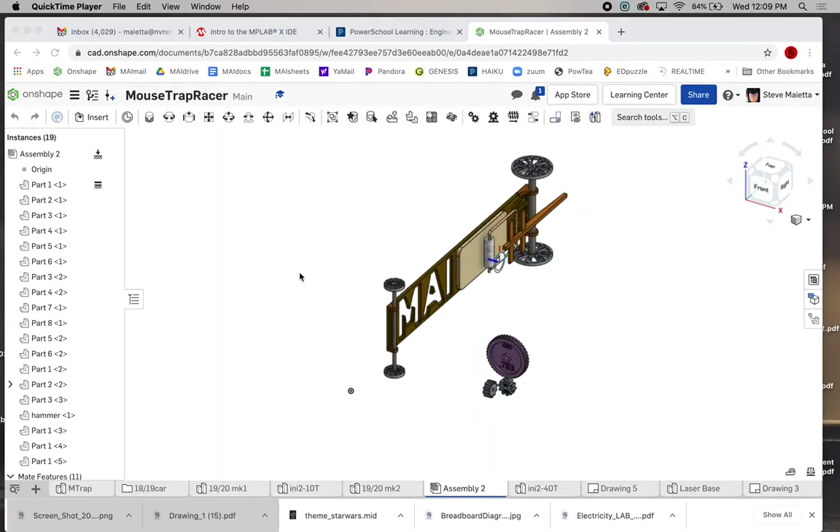We are going to make parts ready for the laser. We're going to cut this part and these parts. Here we go. So the first thing we do is we have to put these parts in a drawing.

Down here, plus, create drawing. This is size of paper. A is a sheet of paper like from your printer. It's probably bigger than our laser cutter, so just go ANSI C. That's going to be bigger than you need.

Now we're going to insert parts into our background here. What I'd suggest first is get rid of all this extra stuff on our drawing. We're not making a drawing to print out to someone or send. We're making a drawing just as a platform for our laser. So you don't need any of that stuff. Delete. There we go. Here we're going to insert.

We're going to insert again, and find the parts we need. All right, I've got a lot of parts in this file. I've been using this for years, so let's take the parts that I needed. Let's take part 1.

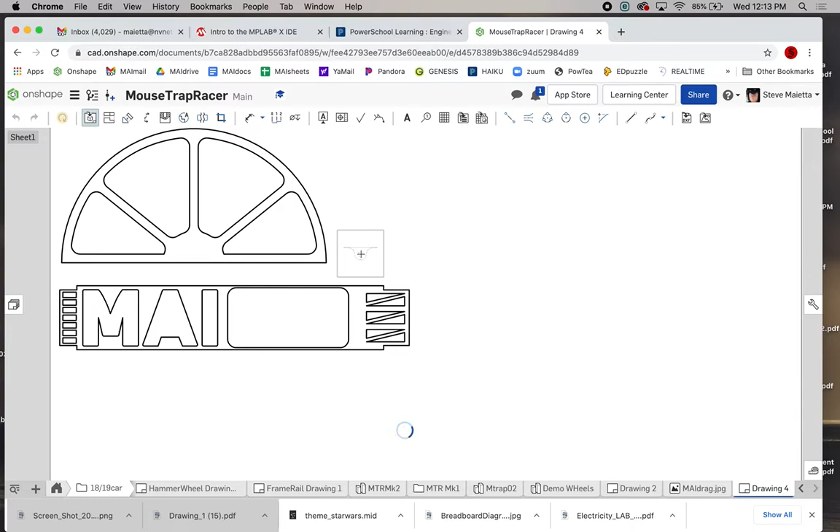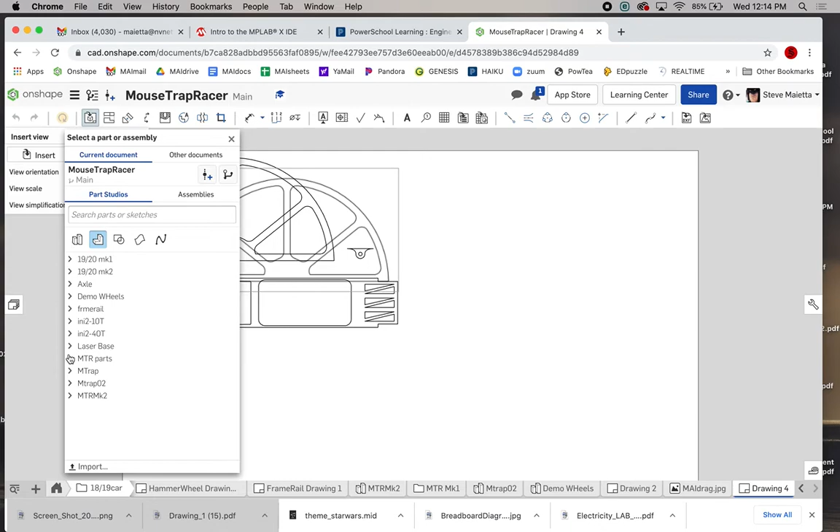So I'm going to put that in once. And I'm going to Escape. Now, if you need more than one of those, you need to insert it more than one time. So I'm going to insert again. If you were standing in front of the laser, you could quickly copy paste and make duplicates. But since I'm doing this for you guys, if you're not coming into school, you need to insert this part twice if you need 2 of those parts. So I'm going to insert that part again. Now I have 2.

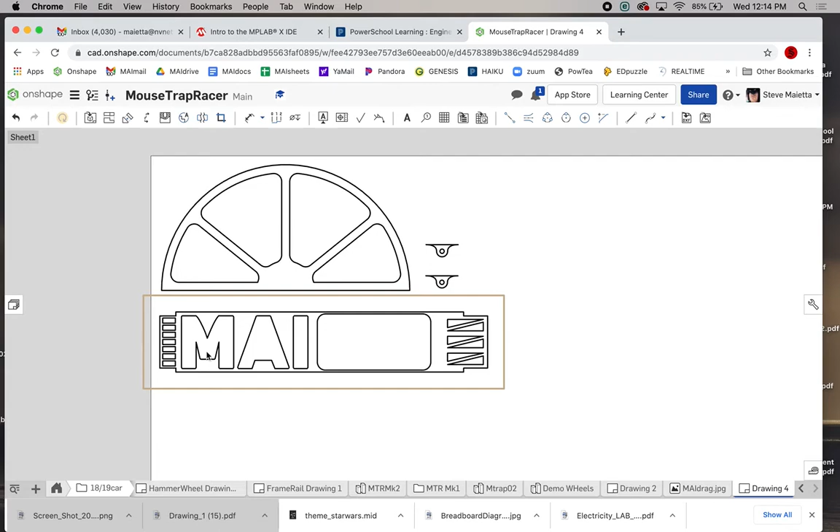Escape out of that second view. There we go. So now I've got my parts lined up. They're on 1-to-1 scale, they fit nice, they're looking good. Okay, we're almost done.

Now we need to export this as a DXF file. So I go to the tab down here, 2-finger click, Export. Give it a name, your name. Give it an 01, because you're probably going to be sending more than one set of files over the course of the next month to Mr. Maietta. So give it your name, 01 if it's your first set. Second set, 02. Be organized.

Format, DXF. All this other stuff, you can leave it. Click Export. And in my case, it's going to drop right onto my Google Chrome browser window here. So what I do, my organization, is to drag it onto my desktop. All right, I'm going to drag it onto my desktop. And now it's there as a DXF, okay?

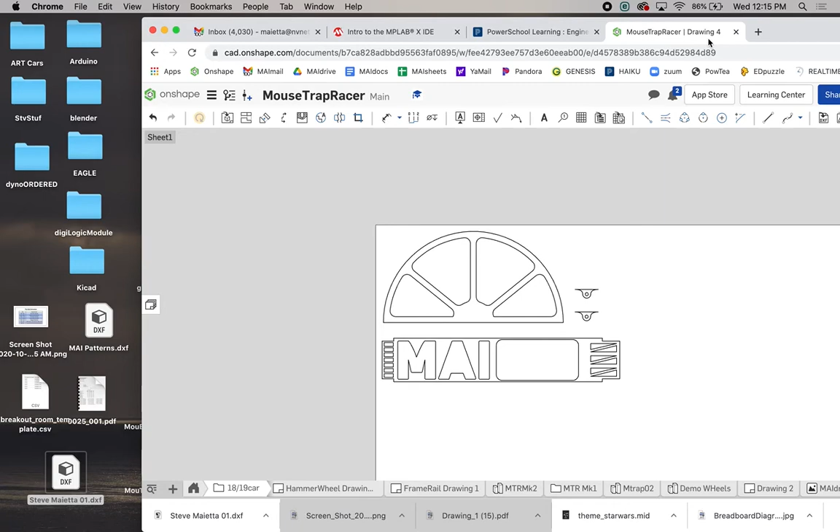At this point, you guys are going to insert it onto your correct folder, which is on the work schedule page. You're either in period 8 or period 6. So you're going to go to the Google Drive. Here it is, it even says drop files here. So you can drag and drop, or click new and search for your file. Fortunately, I know mine's right here. I can drag it and drop it. It's going to upload. Bang.

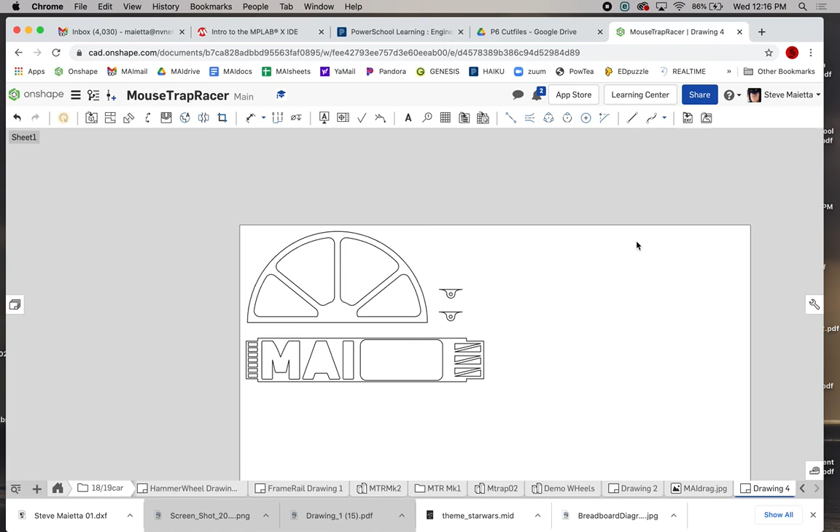There it is, .dxf. And then Mr. Maietta can, at his leisure, send this to the laser. Okay? That's how we do it, boys and girls. Quite simple, all right? I'm going to make these parts for you as best I can. But you guys got to make sure that you follow the restrictions, okay? Scale must be 1:1, and in the folder it must have your name, so I know whose parts I'm making.